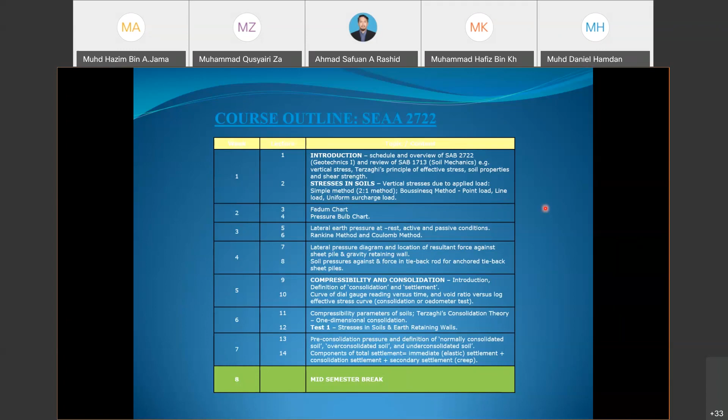So then test 2, okay, all the question will be related to chapter 2, on the compressibility and consolidation.

Then on the 11th week we may learn on the slope stability. So daripada sini awak akan belajar how to calculate for the factor of safety, sebab slope stability dia menggunakan factor of safety. So you may learn how to calculate for the factor of safety, for infinite dengan finite slope, so daripada situ awak dapat idea how the theory or the knowledge behind the slope stability. Actually, masa awak kerja nanti, awak takkan guna this hand calculation. Normally awak akan gunakan what we call as the software.

Okay, then there will be a revision week, and depends if the coordinator decide to have a final exam, so you will sit for the final exam.

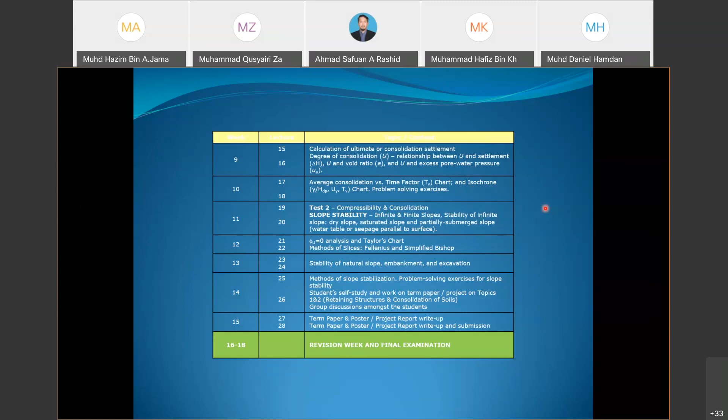Saya nak tahu semester ni semua online ataupun akan ada face to face? Online, Doktor, semua online. So bila habis semester ni? Bulan 6 tak silap, bulan 6. So sampai bulan 6 lah kita akan ada online class.

Okay, awak akan ada 2 test untuk awak punya coursework. Setiap subjek, setiap chapter akan ada assignment, maknanya ada assignment 1, assignment 2, assignment 3. So awak akan diberi satu projek, jadi total coursework awak ada lebih kurang 50. So untuk 50 lagi, sebelum ni kita gunakan final exam.

Kalau tak, dia akan tukar kepada projek yang besar. Projek ni pun individu, dan depends bila awak kena submit projek ni. Normally akan diberi pada study week sehinggalah kepada beberapa hari terakhir sebelum markah dimasukkan.

So itu adalah untuk assessment.

Okay, Doktor. Nanti saya akan cuba bagi secepat mungkin untuk assignment, sebab assignment tu based on lecturer masing-masing.

Untuk group, untuk project nanti coordinator akan decide. Untuk projek yang coursework, bukan projek untuk yang mewakili final exam. Kalau dia kata bebas untuk lecturer decide, so saya akan bagi projek juga. Tapi untuk yang 50 yang terakhir tu, nanti akan diputuskan dan saya akan maklumkan.

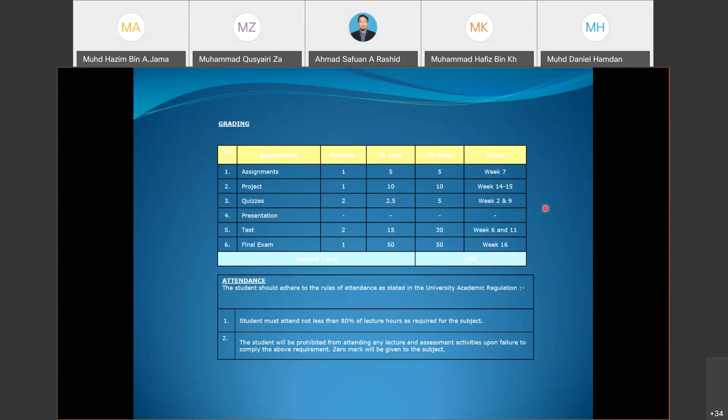Awak nak belajar ini ke ataupun macam mana? Follow Doktor lah. Betul, follow, setuju, Doktor. Okay saya recap balik stresses in soil, nanti apabila kita masuk kepada yang lebih detail, awak dah faham kot, sebab benda ni penting. Sebab ini tak dalam subjek geoteknik satu ni, tapi ini adalah apa yang awak belajar masa geoteknik, masa soil mechanics. Okay, kejap, saya nak minum air kejap. Boleh, Doktor. Beres, Doktor, beres.

Okay, so kita tengok on stresses in soil.

Okay, so stresses in soil.

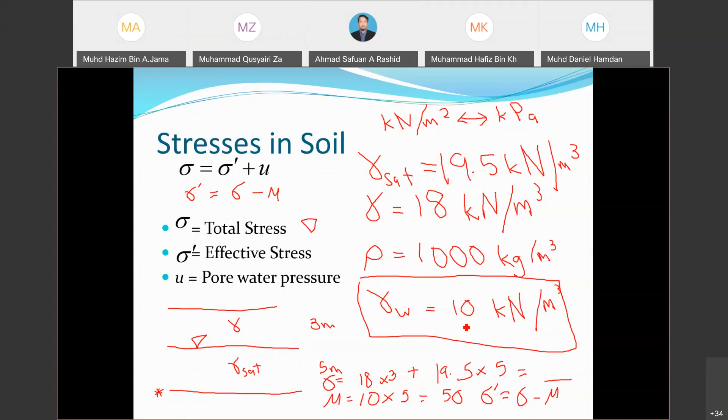Okay, for example, if the problem is located at, what's it called, a lake. Let's assume it's a lake, since if we take a river, the water moves. So we have groundwater, water which is above what we call the lake bed.

Then we need to determine the pore water pressure, effective and total stress along the XY. So this is the XY, the cross section, XY. But it gives the whole thing down to the base, meaning by right it should only go to Z. So we change this to XY so it's not confusing. Sorry, so this part should not be looked at.

So, total stress is the combination of effective stress plus pore water pressure. So whatever value from the pore water pressure and also the effective stress should be combined together to get the value for the total stress. In this case it shows, since it only uses symbols, it takes some time to understand, but after this we will show an example based on magnitude or value.

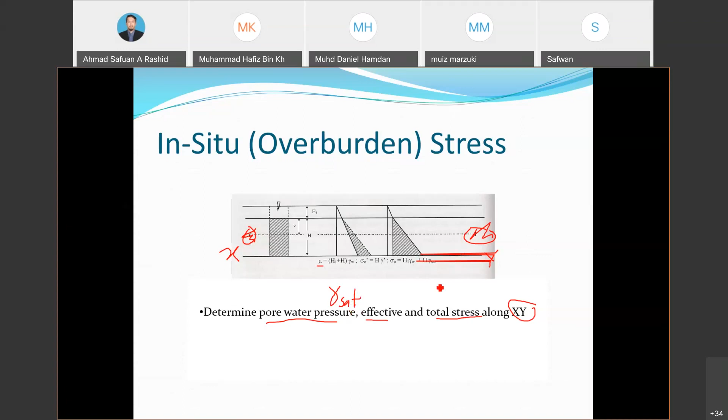So when we use the saturated value, in order to get the effective stress, this saturated value should be minus the unit weight of water. It must be subtracted with the unit weight of water since we want to get the effective, or the term effective unit weight, where there is no water.

Then we may multiply for this case only with H, since the depth that has ground or soil only starts here until H. So this is what we call the effective vertical stress. You can see there's a symbol of prime, so this represents the effective unit weight.

Okay, so that is for the effective unit weight. Later on for the total, either you want to combine the value from the pore water pressure with the unit weight of water with the effective stress, or you can just use this equation, which is H1 times the unit weight is the value for the stress from 0 to H1. Then from H1 to H, you may use the saturated unit weight.

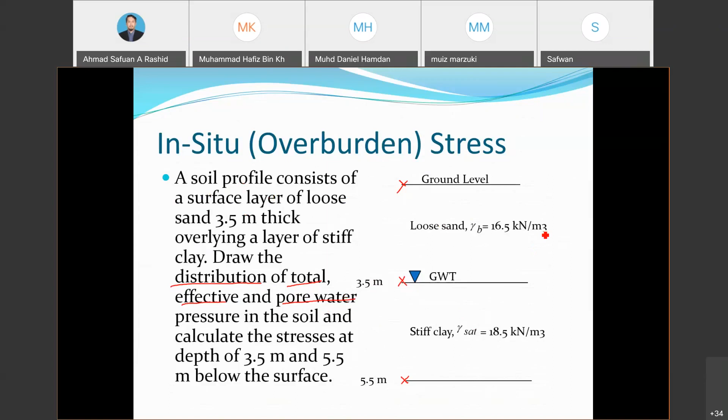Because if you use 9.8, you will get this kind of value. If you use 10, you will get a different value. So we need to draw accordingly. That's why in order to draw or produce this kind of diagram, first you calculate for the total.

Do not calculate for the effective first. Go for the pore water pressure diagram, and the last one will be your effective. This is much easier compared to calculating total first, then producing effective, then pore water pressure last.

So from here to 3.5, this is kind of your diagram. From 3.5 to 5.5, you may have another kind of diagram. Why is this diagram important?

I will explain later when you move on to lateral stress, because in order to calculate the load, you need to get the idea of this area. So how do you get the area?

Yeah, this is simple. It means half times - what's this called - height H multiplied by width P. So that is to get the load.